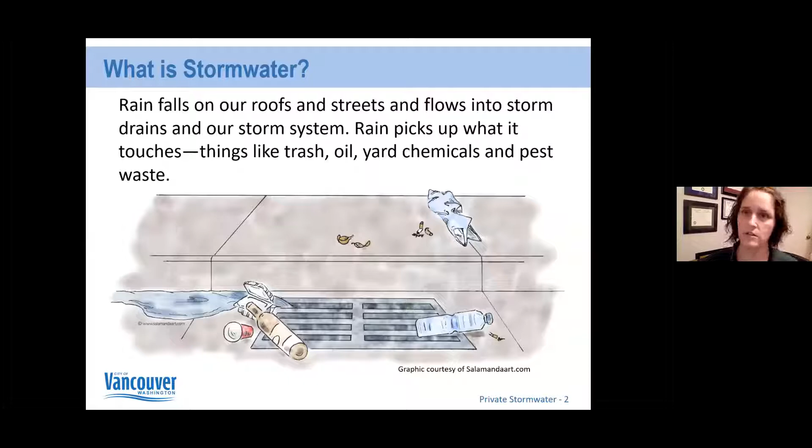There we go. Okay. So the first question, the place to start is, what is stormwater? So to talk about stormwater facilities, we have to understand stormwater. In real simple terms, it's rain that falls on the roofs of our houses, our driveways and streets. It goes into these storm drains. So this is an illustration of a storm drain that you would typically see in your neighborhood. They're out in the street and they collect that rainwater that runs off.

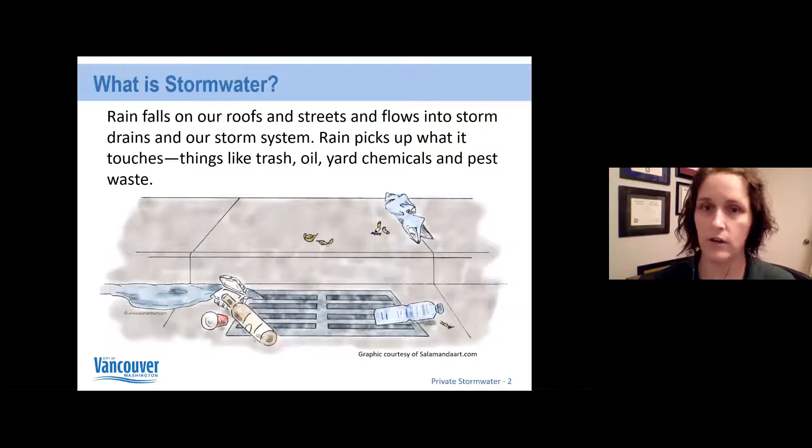That runoff picks up all kinds of things, everything it touches, whether it's leaves in the fall, trash, oil from your driveway, cigarette butts, that kind of stuff. It all gets picked up with that rainwater and carried to the storm drains. So that is stormwater, which is the technical term for the system that we have to manage with the City of Vancouver. We have a permit from the state.

So one of our permit requirements for the stormwater management is to have private facility maintenance. So the code says that the owners of private stormwater facilities are responsible to operate and maintain those facilities. So we have just over 1,400 private facilities in the City of Vancouver, many of them in residential neighborhoods, lots on commercial property, city property, along the roadways.

Basically all that rain that falls on roofs and driveways has to be managed by a stormwater facility. That's what the state requires. We have to have these facilities to remove pollution and slow down that stormwater from reaching our creeks and streams. So typically stormwater facilities on private property are recorded in a plat, which is the real estate documents for that neighborhood, and they may also be in a covenant.

So if you have a homeowners association like Northfield, there may be covenants and restrictions for what you can have, the color you can paint your house, that kind of thing. So that maintenance should be included in one of those legal documents. And then the maintenance has to comply with either the state manual or an approved site manual. So the city at the time of construction gets a site plan, and we keep the records for that.

While we don't own private facilities, we do have the authority to inspect them for compliance. So we can come out unannounced and look at the private stormwater facilities, see how they're working, take photos, and we enter that into a database, and we look at a condition assessment. How well is it working? It was designed to do A, B, C, slow down water, infiltrate rain. How well is it working? How well is it functioning?

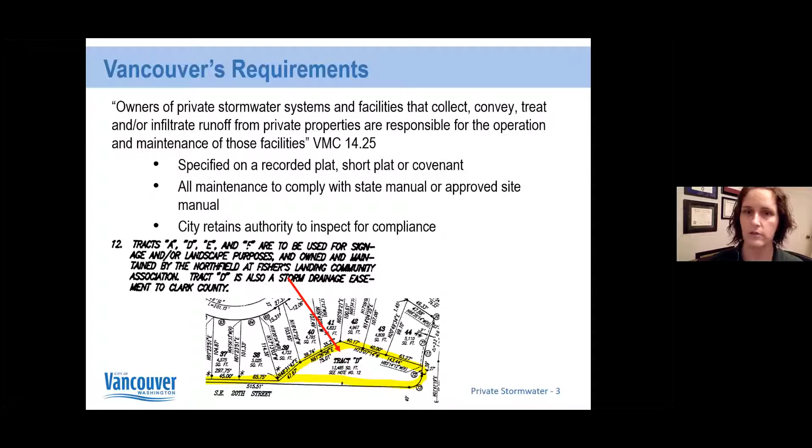So the code and the ordinance for the city's maintenance requirements refers to the approved engineering plans. So we just go look at the plans that are on file from the original construction, and we just say, is it working? We list those deficiencies in our database. And then if there's something about the facility that the design isn't working anymore, or say you have street trees that are nearby that are causing issues, private facilities can be modified, but they have to be designed by a professional engineer. So if you want to change your stormwater swale on a private property, you can do that at any time. It just has to be done by a professional engineer.

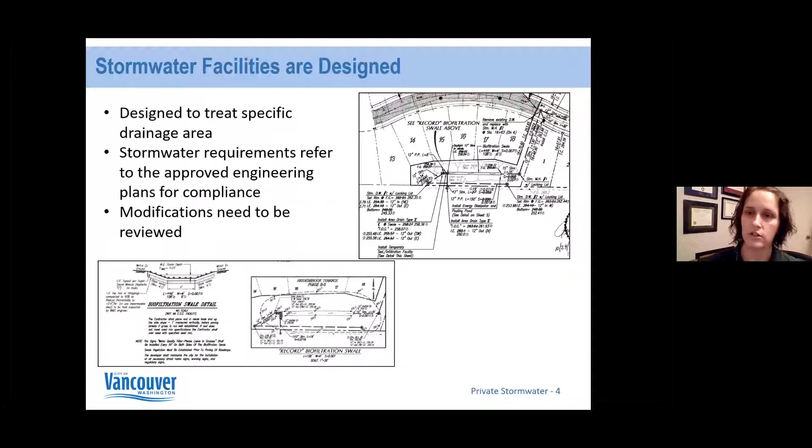And then they have to submit, like these drawings you're seeing here, an engineer would have to submit a drawing for the revisions. So it's not that you have one layout from the 1990s and you're stuck with it forever. You can always revise that facility as long as you have a professional engineer and city approval. So pretty straightforward process.

Northfield has a bioswale, biofiltration swale. There are a couple different terms depending on the time when the facility was designed, but it's a really simple, low-tech stormwater treatment system. It's just meant to get the stormwater into the facility, have the water run across the grass, slow it down, and soak it in. That's the long and short of it. There's no special soil media. Sometimes they would add compost if the construction site soils were poor, or if you had fill at the site. But typically, it's just grass. It's just stormwater coming into a grassy area that's dedicated to hold that water and soak it in.

And in the 90s, in 1993, is when we started our first swale requirements. This was state of the art. This was like cutting edge technology. And we were trying our best to keep pollution out of our creeks and streams. So these grassy swales were thought to soak up pollution, whether it's nutrients like fertilizers, or just even trash and leaves off of roadways. They would come into these grassy areas, be easy to clean up, and you wouldn't have to remove that stuff from creeks and streams. So we were trying to protect our water bodies, and this was a really simple way to do that.

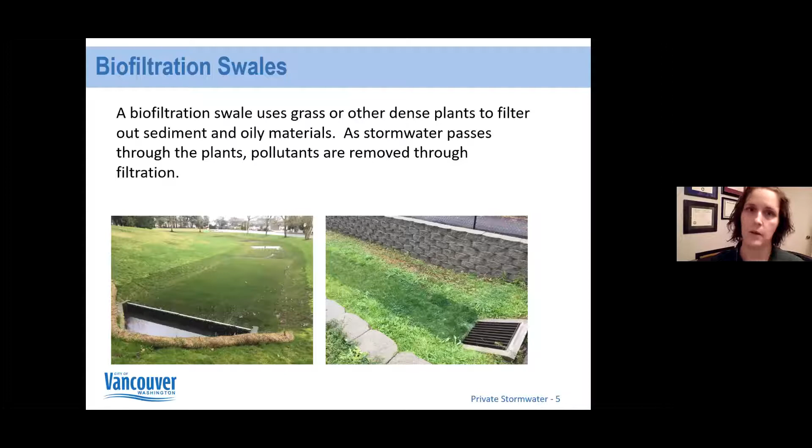So this is a couple of examples from commercial properties that just show there's a lot of variety of swales, but the consistent thing is just they're flat on the bottom and grassed. So trying to just filter the stormwater through the grass. Here's a couple of different views. I think these images are a little easier to understand than the engineered drawings, especially if people aren't looking at engineered drawings every day like we do.

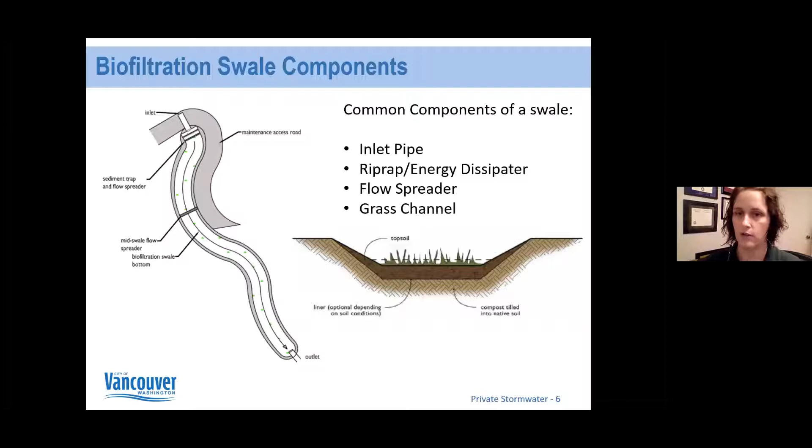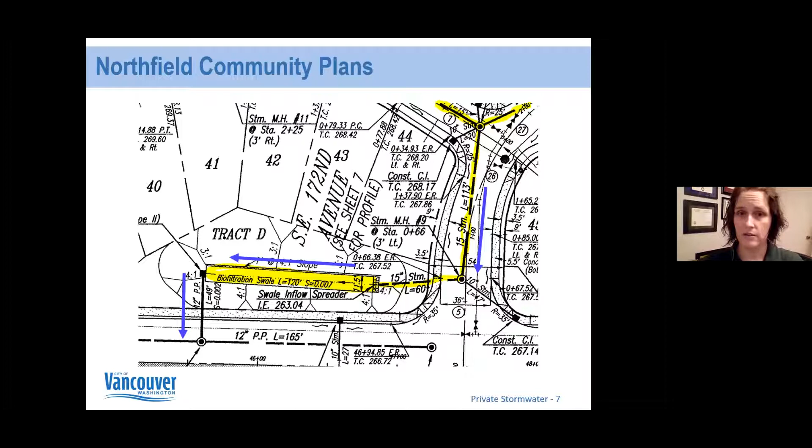So you can kind of see Tract D. It's pretty big for the facility being as large as it is. We have some more detail about the width of the facility. Part of it was changed at one point, and it was reduced from 13 feet wide down to 11 feet wide. So given the size of Tract D, there's a lot of area in there that's not swale, that's landscaping and kind of buffer plantings.

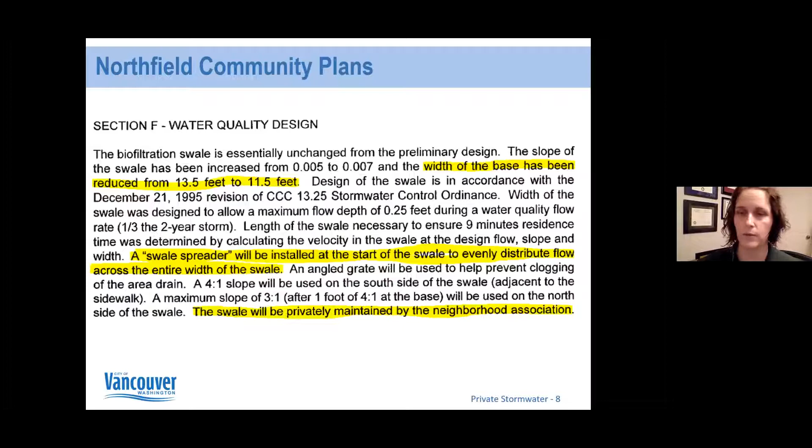This is some of that design narrative from the engineer at the time that it was designed, and it talks about that energy, that flow spreader, and the grate on the downstream end where it connects to the city. So just a little bit of context on the design, that it was modified at one point, and there is a specific note in here that the swale will be privately maintained. And so that was the intent from the very beginning, from when it was first installed. And it's consistent with what the recorded plat, the real estate documents show.

We'd like to see this pipe come into an 11-foot wide area that's flat, so that water just comes right out of that pipe and into the grass. There was in the engineering plans a flow spreader, so there should be a concrete bar to slow the water down so that it doesn't erode and dig a hole by the pipe.

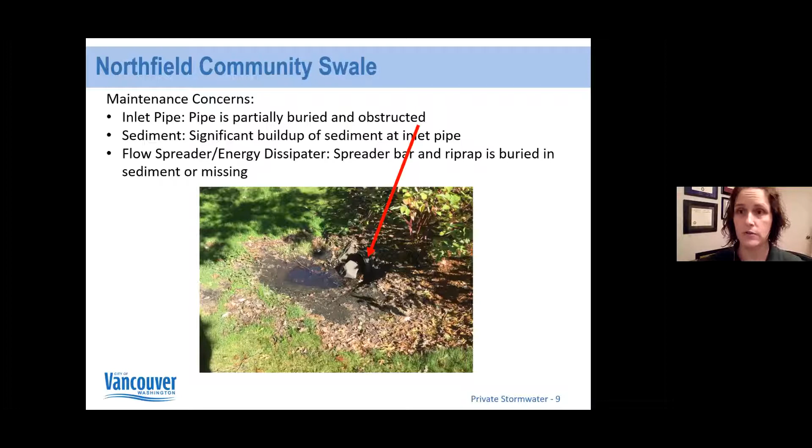We're assuming that the flow spreader is buried under sediment and leaves. So for digging this out, you'd want to be careful, and preferably hire a contractor that's mindful that there is a concrete bar under there so that it doesn't get damaged and you don't have to replace it. So you want to carefully have that sediment and leaf debris removed without ripping out that concrete spreader bar.

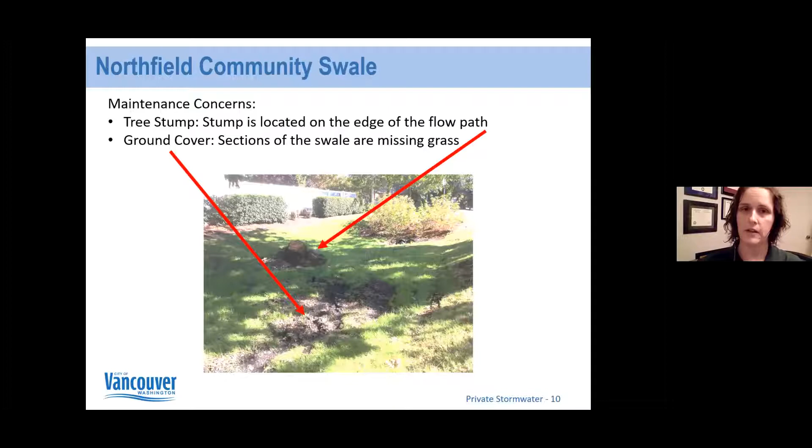And here's a photo a little farther down. So the photo is looking back towards that inlet pipe, which you can see there kind of by the bushes. But there's a tree stump. The tree was there last year in the photos that we had, but this year it's been cut down. And if you think about the bottom of the swale needs to be 11 feet wide, a flat space, that tree stump probably needs to come out.

The way the base of the trees grow will make the water run around it, and you want the water to have a straight, flat flow path. So that tree stump has to come out. There's also sections of the swale that are missing grass. So there's some bare soil here. We're concerned about that because we really want to see the grass be there to soak up the stormwater.

And it's tough to tell from this, but it looks like there is grass in other places. Sometimes we have a lot of shade and have to try a different seed mix, but it does look like the facility can grow grass. It just maybe isn't in some spots. So it needs some sediment removal probably to get that pipe open, and then reseeding to get this grass cover throughout the whole swale.

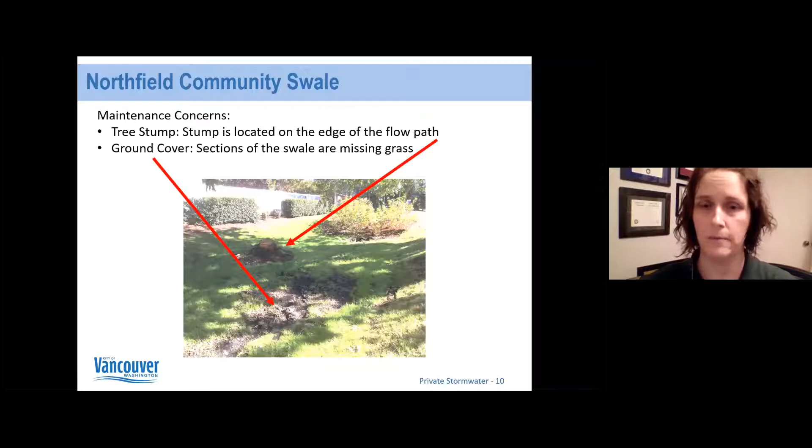And for this particular facility, it's not a pond. It's meant to be a dry swale. So we need it to have a grass bottom and to be mowable. And that conflicts with these cattails. So they have to be removed. We don't allow you to go in and spray them with herbicide because this is a stormwater facility. We want to protect the water quality. These need to be mechanically removed.

So you need to have equipment to go in and dig out the roots and take them out and properly dispose of them. So this is a pretty big issue for this swale because you don't have the flat bottom and you don't have the grass. So this facility is really not meeting the design intent. Those cattails will keep the water pooled up and keep it from running out, keep it from flowing across the way it was designed to. So it's a pretty significant issue that needs to be resolved.

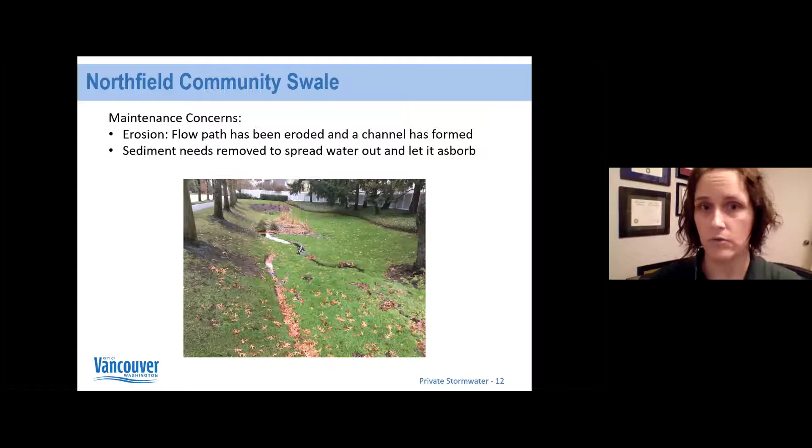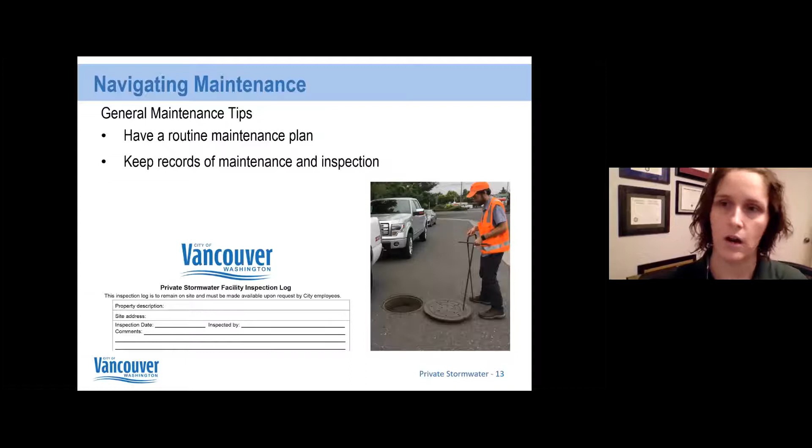So some general maintenance tips about private stormwater facilities is to have a plan. Have a plan for routine maintenance every year, twice a year maybe. You're going to need some trash removal, leaf removal, sediment removal. That needs to be part of budgeting and planning for the care of that facility, something the HOA should have. And then keeping records as you do maintenance. If you have a contractor come out and remove sediment or remove a tree, keeping records of that is really helpful. You want to find out who is managing maintenance.

Is it the HOA? Is there a board member? Is your property manager dealing with it? Those are all possibilities, but in terms of keeping track of your swale in your neighborhood, know who is responsible for that, who is managing the maintenance, and then have a copy of those approved plans, because if you don't know what it's supposed to look like, it's really hard to keep it working.

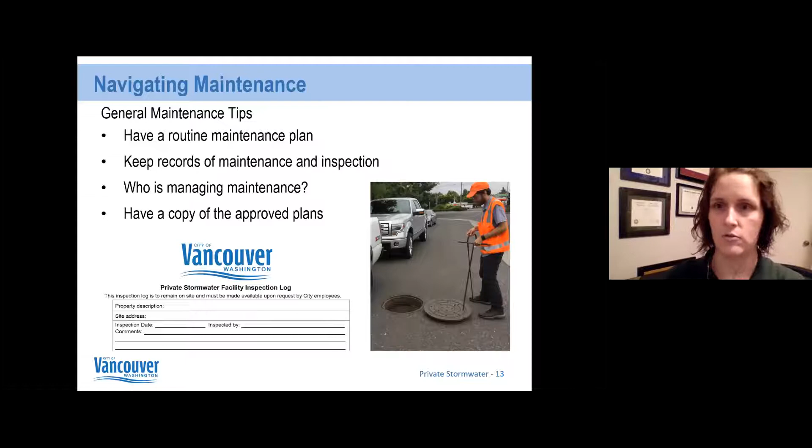And the approved plans are not so easy to read, but if you're working with a contractor or maintenance provider, it should be really valuable information for them on what services you need and what you can provide. The city has an inspection log, just a template form that you can use. There's a screenshot of it here, just to keep with the HOA records. Somebody was out on this date and here were the comments. Here's who's providing our inspection. And that will really help with continuity in the facility.

A lot of swale maintenance can be self-performed or done through your landscape provider. So if you have a contractor that's coming through and doing your mowing, there's a lot of maintenance that's just routine maintenance that they can do. Some of them are just mowing the grass, reseeding, removing weeds, and then that sediment and debris removal.

So when you have a little bit of sediment or just a few leaves, have your contractor go out and remove those when it's maybe a wheelbarrow full, rather than having to open up the swale with all of these leaves. Those are routine activities that can be done. If your landscaper is coming out every 2 weeks or every 3 weeks, it's something that they can easily take care of.

There is a regional website with a lot of resources, the Stormwater Partners, Southwest Washington, and we have guides on the website on all of these different stormwater facility types. So there's a lot of resources there, checklists, videos. There's a contractor list. It's a great resource to check out and to share with your contractors or your maintenance provider.

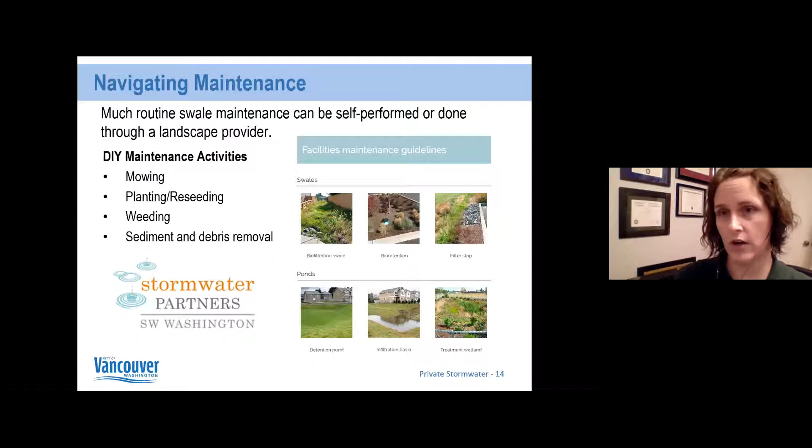But you can't always do the maintenance yourself or with one of your landscape providers. Sometimes, if there's a manhole or a vault, it has to have somebody that's trained and has the right equipment to do that cleaning. So in the example of Northfield, we're talking about a pretty large rehab. This is a significant grading issue. There may need to be repairs to the pipe. We don't know. We can't see the whole pipe.

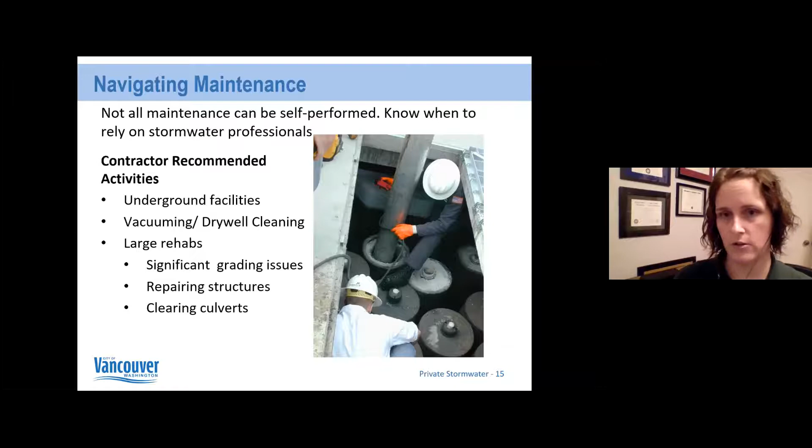So we really recommend that a contractor be hired, somebody that can come in with a mini excavator, remove that sediment, have it done in a couple of days, rather than trying to have a landscaper do the work by hand. It can be really hard to make a flat bottom facility if you're doing it by hand. And just in terms of getting the swale back up and working, hiring a contractor is really the most efficient way to do that. And we can help you with that process as well. We have a contractor list available.

And really what you want to think about when hiring a contractor, especially for a swale that needs a significant amount of work like the one at Northfield, is to try to get 3 bids. Even if you have a contractor you usually work with, you really want to compare prices. You want to look at the detail included in that bid. Different contractors have different tasks they think are associated with the job. So have them detail that work.

And in terms of Northfield, we really would want to see survey, somebody taking some elevation shots, making sure that you're getting seeding, getting the vegetation back in that facility, and then properly disposing of the soil. That excess sediment that's accumulated in that facility, and the cattails especially, they need to be removed and they need to be properly disposed of. So you don't want a landscape contractor who's going to say, I don't know what to do with this material. You want to ask at the time of bid.

And another good thing to ask when you're hiring a contractor for a private facility is if they guarantee their work. If they do the work and they leave and your facility is still not functioning properly, are they going to guarantee that work? If there's still standing water, if the grass washes all out, are they going to guarantee that work? Are they going to guarantee that when they're done, your facility will be in compliance with city requirements?

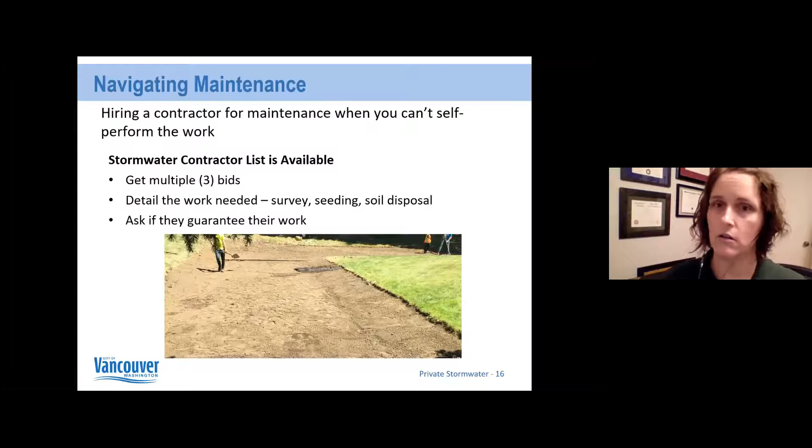Another thing to think about with your private facility in your neighborhood is that everything that happens in the neighborhood, that first slide we talked about, stormwater is just the rain running down the street that picks up everything that's in the street. That includes stuff on your driveway or the sidewalk, even things in your yard. So think about how you can prevent those things from ending up in your swale.

Things like pet waste, leaves, anything that you can keep cleaned up out of the street that doesn't end up in your swale is something that doesn't have to be cleaned up later. So we want to prevent pollution wherever we can. We really want to try to keep things out of the street, out of the storm drains, and out of your swale.

One good way to know if you're having any kinds of specific issues is to look in the swale after a storm. Go in there after it's been sprinkling all day and see, are there leaves? Is there trash? Do you see an oil sheen? We've got a couple of pictures here of oil sheens that we've seen in neighborhoods. Those leaks and drips on the driveway, they don't seem like much, but when you get a nice soaking rain, 8 or 10 hours of rain, that oil will end up in the storm drains and it will go into the stormwater swale.

So we really want to see you use a dry absorbent. Kitty litter or floor sweep is fine. It doesn't have to be a special product. We just want to see it brushed into the pavement and then swept up and put into the trash. You want to properly dispose of it. Don't blow it out into the street or wash it into the storm drain. You really want to try to get that oil absorbed and then just put it in your regular trash. That's totally acceptable.

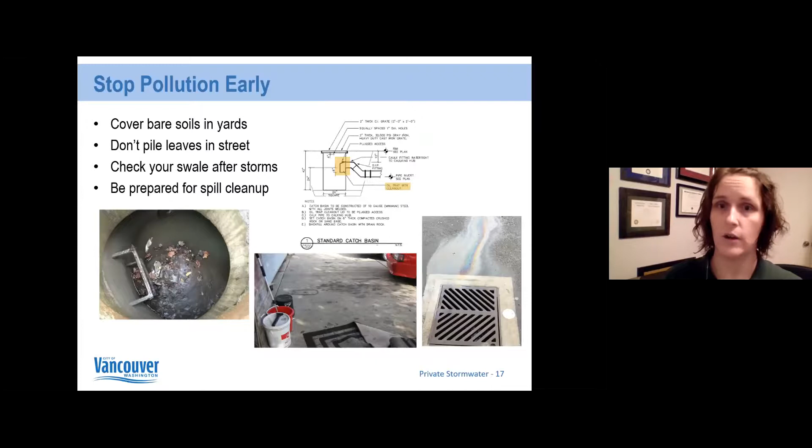We're always trying for voluntary compliance. It's really important for us to try to work with homeowners to get these facilities functioning. We do have code enforcement requirements that we can resort to if we don't get some kind of cooperation, some kind of response. We can do code enforcement, but we would prefer not to. We really want to work with homeowners. We really want to get this done on a voluntary basis.

And so that's what this presentation is about, providing the information to homeowners, putting it out here, making it available. We really want to try to reach folks where they are and provide this technical assistance. So please give me a call or email me about your facility, and I look forward to hearing from you.